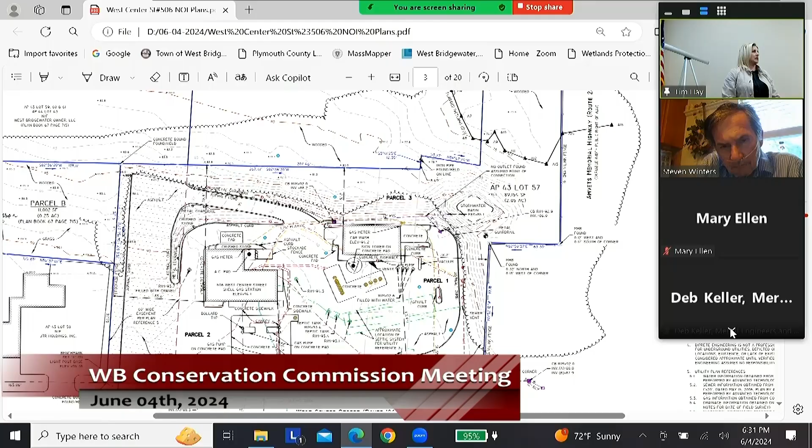That's lot 57, and there's portions of lot 59 and 61, which I will explain to you. So just for history, for the applicant's proposed redevelopment of its property at 506 West Center Street.

The applicant has owned that parcel since 2008. It acquired that - it's an existing Shell station that the applicant acquired from Shell back in 2008, and they've been continuing to operate it as such.

For permitting history, I'm not sure if the commission remembers or was here at the time, but back in 2018 we had started this permitting process for the redevelopment. It's a full raze and rebuild of the existing site to put a Seasons Corner Market, new gas pumps, etc. We had started the process back in 2018, and we were trucking merrily along.

Then we had COVID, so that paused the project. Actually, in hindsight, probably for the better, because recently the applicant has been able to acquire portions of the abutting parcel - that's the reference I made to lots 59 and 61 - to have a better, more complete Seasons Corner Market to the specs that they would usually raze and rebuild these developments.

As you know, the existing station is a bit dated - I know it's a bit of an understatement - but we've been very eager to raze and rebuild and put up a new station and Corner Market. So that's the permitting history.

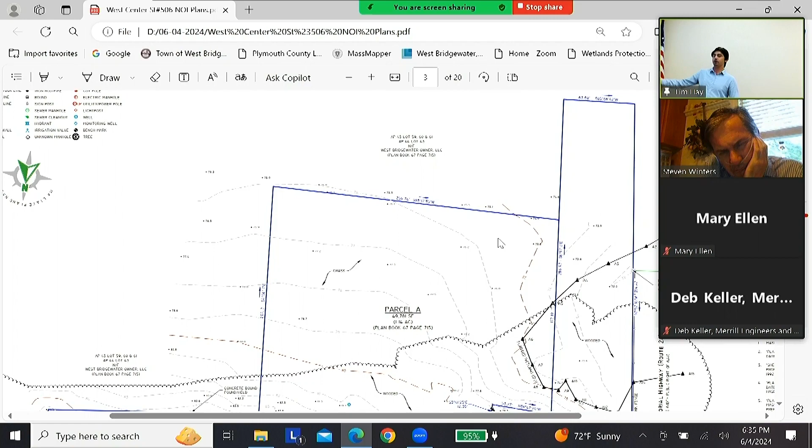Topography ranges from approximately elevation 95 at the building to about elevation 74 in the rear of the site. You can actually see currently, if you go down a little bit, the grade really drops off towards the back of the site.

Currently, stormwater flows from north to south, predominantly from the bottom of your screen to the top of the screen, and ends up either in the wetland, which is in the top right-hand corner, or it continues on to the abutter. A small portion of the site runs out to West Center Street, where it's captured in these catch basins in the right-of-way.

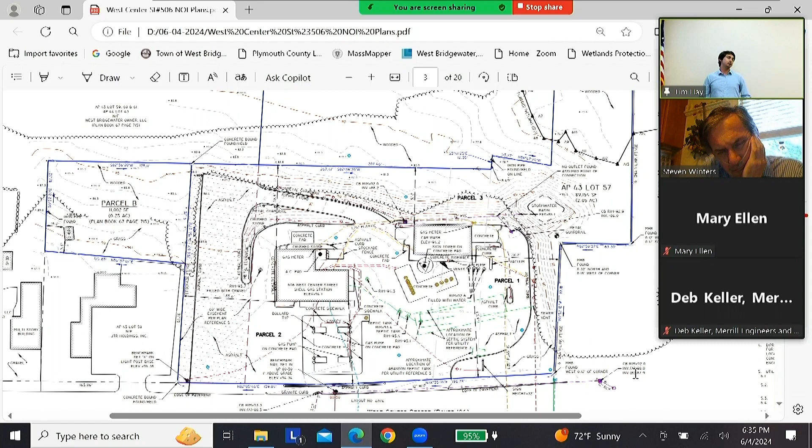Currently, the stormwater on site is captured by one of two catch basins located right here and here, which is then directed directly to that stormwater basin where it overflows into the wetland. The wetland flags are shown on this plan as previously approved from the ANRAD filing a few months ago.

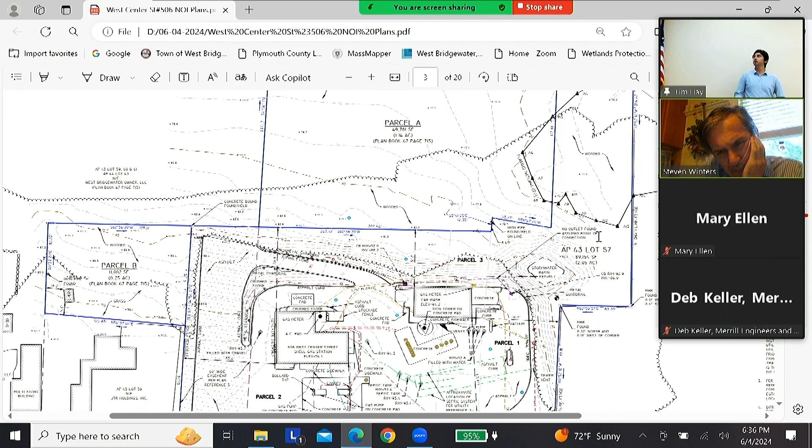One other thing to note for this site is hydrologic soil groups A and D were used in our drainage analysis. You can see from the way the topo drops off in the back and the wetland that the D soils tend to be in that back portion, and we have A soils in the front of our site. We also completed test pits, which confirmed what the web soil survey showed us.

If you want to go ahead, I think 2 plans. Yeah, keep going. And 1 more. Yeah, this works.

This is our proposed site layout plan. The project is a mix of redevelopment and new development as defined by the Mass Stormwater Standards. The site proposes a 4,600 square foot convenience store located here with associated drive-through and parking spaces. We're proposing 6 fuel dispensers with a canopy here and 1 single DEF fluid dispenser island here.

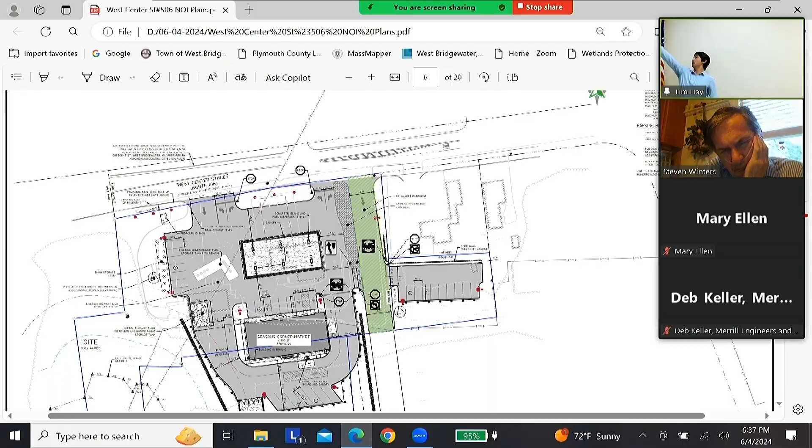There is an existing highway sign on site that will be in the middle of the site, so we're proposing to relocate that sign. The existing underground storage tanks for the fuel will remain.

There will be a total of three retaining walls to fight the big drop-off that we have in the back of the site. The first one being right here, second one being here, and the third being a smaller knee wall on parcel B.

As you can see, we have a green hatched area here. This is a 30-foot access easement, and that access is to the larger warehouse development going on behind us. We have filed a request for a determination with DOT, and that is currently under their review. So as we know more, we'll report back. But my point is that changes are possible due to that coordination.

Can you keep going to the drainage plan? Perfect.

This is our proposed utility and drainage plan. As you can see, we will use a combination of deep sump, hooded catch basins routed through an oil grit separator, a bio filtration system, which will be a focal point, and a detention pond prior to being released to the wetland down here.

The focal point has been sized in accordance with the Mass DEP certification and was included in the stormwater report. The treatment train includes pre-treatment that will remove TSS, total phosphorus, and provide water quality in accordance with the Mass Stormwater Standards and the West Bridgewater Authority's comprehensive stormwater regulations.

The proposed development follows the same ultimate drainage pattern, going from north to south. It's a little confusing because we've done a 180 from the existing conditions plan we were initially talking about, but the same overall drainage patterns will remain. We will be reducing the peak flow rates in all storm events.

This project will be constructed in 1 phase, and the soil erosion and sediment control plan will show the measures that will be installed and maintained throughout construction.

We are requesting one stormwater waiver, and that is because of the soils I spoke about earlier. The good A soils, which are better for infiltration, are located at the front of the site, and the D soils that are not as good for infiltration are located at the bottom of the site. In order to still create the same treatment train required for water quality, we're able to accomplish that without infiltration using the focal point, but unfortunately we cannot provide recharge. So we're requesting a waiver from the recharge requirement.

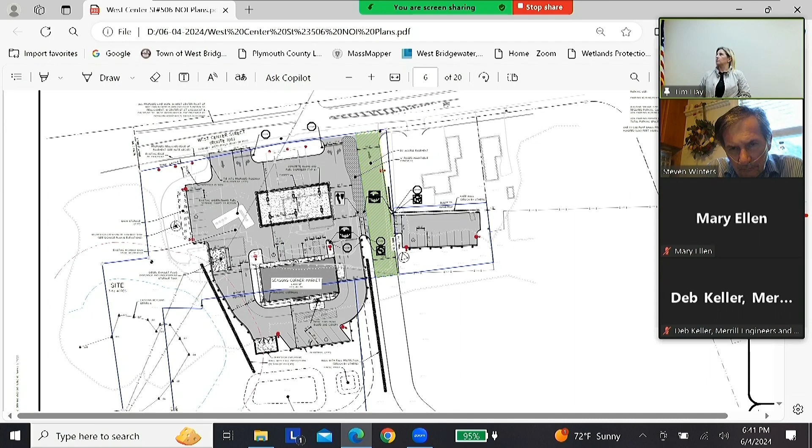I just wanted to reiterate something Daniel mentioned in his presentation, as you can see both on the stormwater plan and previously on the site plan. Tim, can you move to this, please? Understanding that this will be more closely vetted by the planning board and zoning boards as well, I was just pointing this out to you.

We've made a request for determination from Mass DOT, as you can see, for the curb cuts, because this property is encumbered by that green access easement area. Depending on the comments we receive back from Mass DOT, and whether, as they've indicated prior to this point, they're not huge fans of that access easement area, because you can see the curb cut placements to access the site, that was submitted approximately a month ago.

We're waiting to receive comments. As you know, Mass DOT has already looked at some of these plans for the development to the rear, so they've previously commented on it, but we will be subject to the same. That's why we made the request for determination, and so we're just waiting for that.

Station owns that easement? We own the property, and it's an easement in favor of the abutter. So you're allowing them to... Yes. And who's not in favor of it? Station? Quite frankly, neither one of us - owners or station.

Really? Because you can see some of the implications to the site that it makes, and it makes it very challenging. It's also making the grading very challenging. As Daniel mentioned, it's almost a 20-foot difference in grade. And redoing the station, you're coming back? Yes, they're in order, pushing it back a little, which was why acquiring this parcel A area, as we call it, moving that back a little.

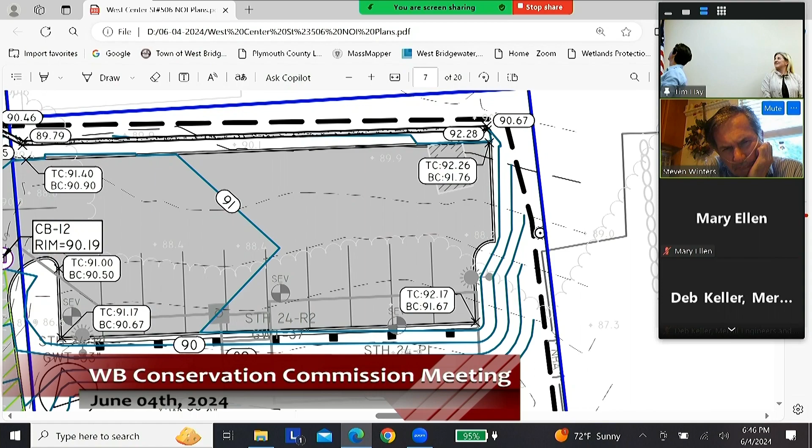Tell me about the drainage. It's impervious surface, so, yeah, correct. If you want to go to one more plan over, we're doing the best job we can to pick up all the impervious area. So there's a catch basin right here, CB-12, so that all of this area drains to that catch basin, which then will be routed to the system. The only small amount that we won't be able to capture would be below that.

My other question was on the recharge you mentioned, could you explain that a little? What I picture is standing water because you can't recharge it. Yeah, no, so it's a great question.

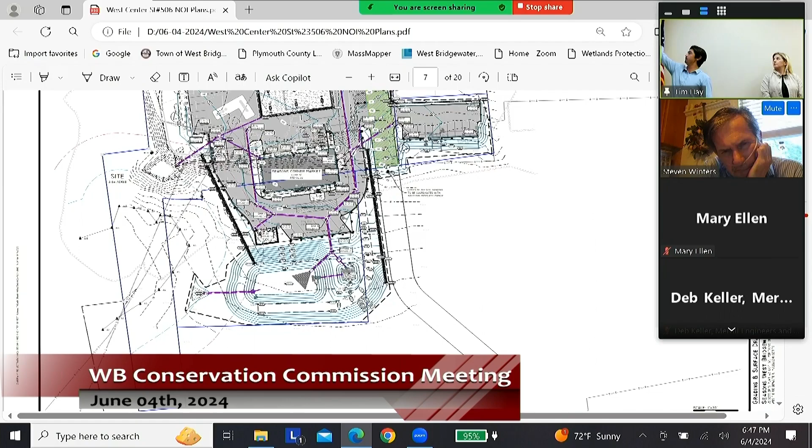If you go down, this is our detention pond at the bottom of the site. And the way we're outletting the system, we're gonna have an under drain, which is this 10-inch pipe going into the outlet control structure. That under drain will be below the finish grade of the bottom of this detention system. And then that will all be able to flow out to this area over here, which is lower than the bottom of the detention system. So it's a recharge, well, you're not really, it's being filtered through the, and so all the water quality treatment occurs before then.

Some recharge will happen naturally within the pond, but we just can't take credit for it. At least it will drain out into the wetlands, and with this design there won't be standing water.

Daniel's the expert on this, but as the site lies from north to south with the grade change, the applicant tried to take advantage of that, accounting for it in the design of where it most naturally fits. There'll be a lot of grading, but it most naturally flows to that point.

So that recharge area, there won't be any standing water there? It's not technically a recharge area. The detention pond will be outletted. They're looking for a waiver for recharge because we're unable to provide recharge given the soils out here, but in this area it'll eventually drain out because of the under-drain we have, so there won't be standing water within this area.

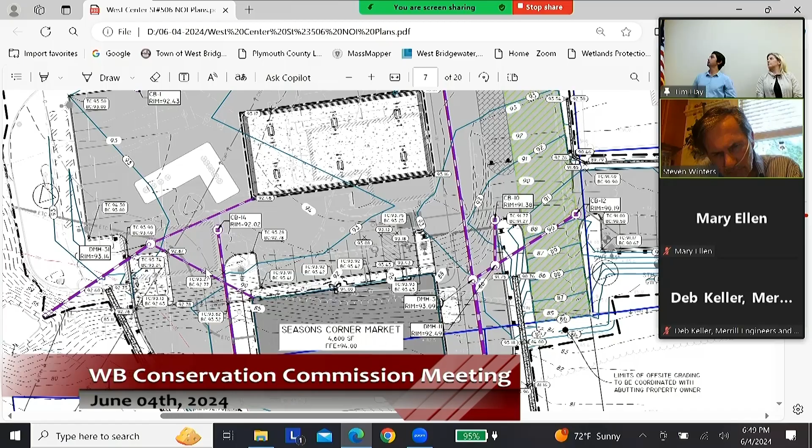You can see here, that's the existing station right there, the existing convenience store. This is the existing drop-off in the back of the site, these lines show the topography. The current barrier wraps around the drive-through in that area Daniel was pointing out. If you use the car wash, that structure over in this area, it's set back from where the car wash sits.

So some fill is going in, I'd imagine, quite a bit of it. Basically this would be where the proposed new Seasons Corner Market would be, down the hill at the bottom.

I suppose, and it's not our purview here, but one of the biggest challenges has always been traffic in and out of there, particularly coming out. I don't know how that gets resolved, but that's not what we do here. That's why I mentioned the request for determination with MassDOT, which is going to be all changed anyway. So that's why I described it as hurrying toward the finish line, knowing we might have to back up a little.

MassDOT is also bumping up against the potential moratorium, so once that roadway's fixed, that's what we're trying to work with. We've had multiple meetings with the town — Michael White's been very helpful, Tim's been very helpful — about the best way to proceed, knowing there are certain challenges to the site, both off West Center Street and the topography and layout, and understanding the town's plans for the West Center Street and Lincoln Street interchange. Being cognizant of that, we need to move forward as far as we can go.

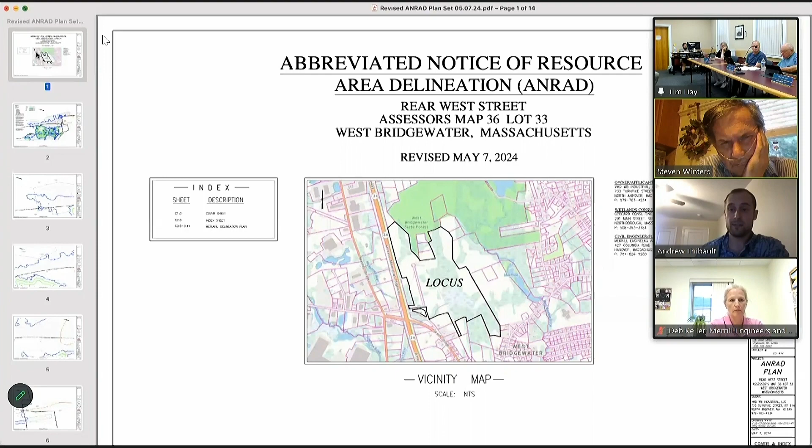Since coming onto the project, Merrill went out and did a significant amount of new field work. They got more detailed topo, more detailed boundary, tree line, and resurveyed the wetland flags. So what we are doing is submitting a corrected, more accurate, and more detailed plan onto the record for the site. As part of that new survey, we were finding areas where the wetland flags were not perfectly lining up - they were located up on fill piles a bit where we wouldn't typically see them. I know during the ANRAD review, Tim himself had a bunch of questions about topo availability.

As the commission knows, there's a significant amount of cut and fill on this site with fill piles located throughout, and the original plans reflected portions of what's available for topo, but not everything. So we had Merrill go out there as recently as this spring and provide a whole new survey of what's been out there. It's important to note that the delineation did not change at all - the flags that Tim and I reviewed in the field just under two years ago are still the same flags that were there, but the survey itself was corrected.

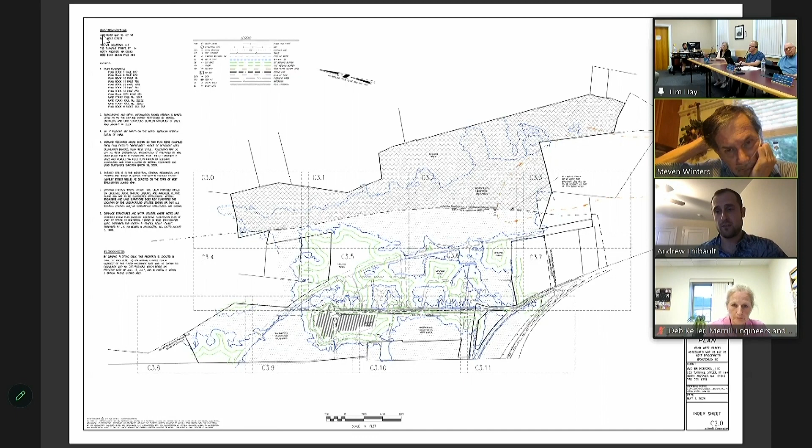So it's an entire new plan set. The limit of confirmation under the ANRAD has not changed - the only thing that has changed is the survey. I think an excellent sheet to capture what I'm talking about would be sheets C3.5 and C3.6 right here. So what we have is a more detailed survey that shows significant limits of the tree line on the property as well as the fill piles.

These were areas where on the original site survey, when Merrill was doing work on the property, we would see wetland flags that would hit fill piles and topos that were close but did not make perfect sense of what they're finding out on the property. So what they did was get a much more detailed survey for us that now shows all of the fill piles, the location of the wetland flags, and updated buffer zones that make significant sense to what you're expecting to see out there.

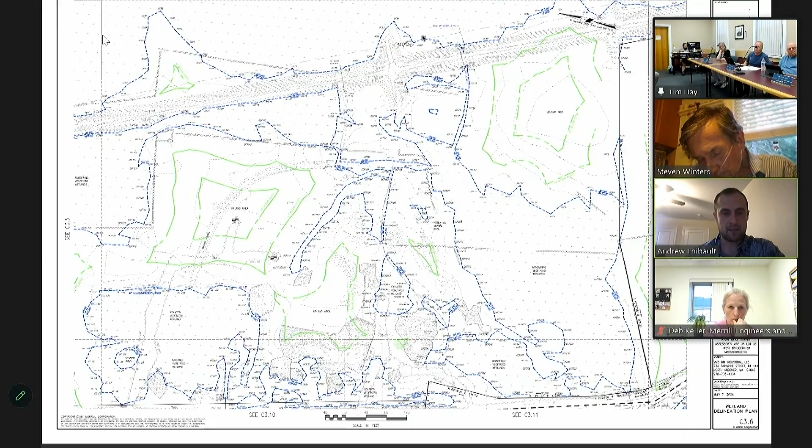I have another visual that I think might be more helpful for the commission, that David prepared for us, showing an overlay of what's changed from the original ANRAD. It helps us see what we saw and why we corrected the plans. Can you guys see this new plan? Perfect. So what we see here is the old ANRAD line that you guys would have seen on the original submitted plan set, shown in orange as the historic limit of what we had here. The blue is what we had resurveyed and rediscovered.

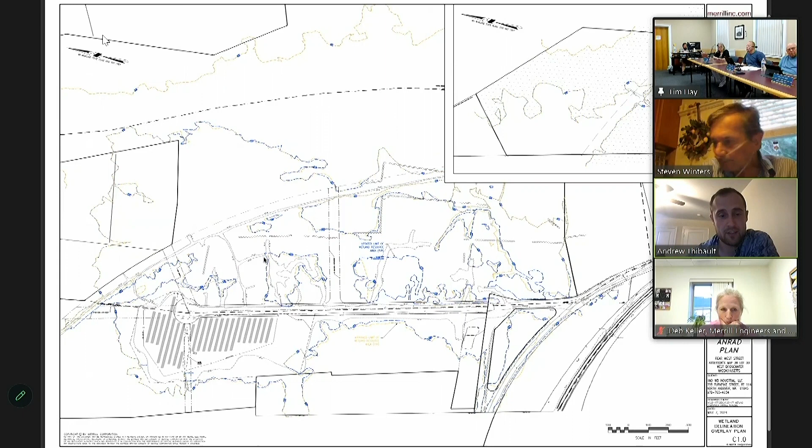When Merrill was updating the entire site survey of the same wetland flag, just field checking each flag, we found that generally the areas of the flags were correct. But the most recent survey, which we know to be accurate, showed a lot of areas that bumped up closer, and many areas not friendly to the site or any expected project on it, but they are what we know to be correct. So the plan was to update the site plans.

We also noticed that the only major revision is the isolated wetlands shown in the center of the site are actually larger in the field than the original survey showed. The flags were always there. Tim and I would have reviewed them in the field, but it appears that during the site survey, portions of them were never gone back and reflagged. So although we confirmed them as accurate in the field, the plans did not reflect the correct location. We increased the survey in this area to correct what was originally flagged as a larger isolated wetland and correctly define that on the plans.

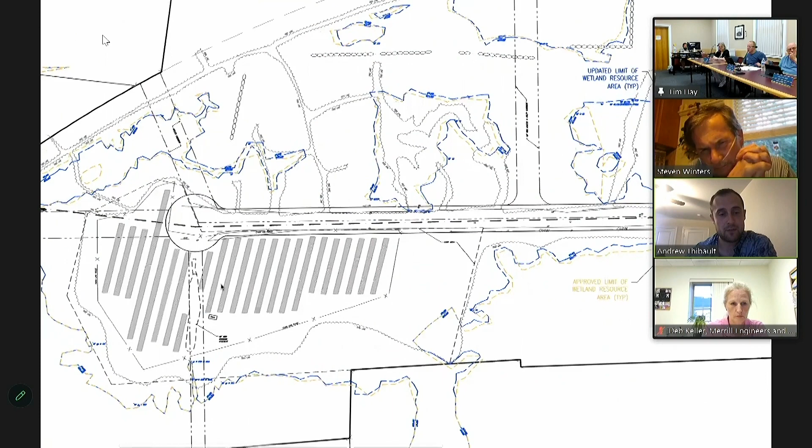The only other major revision to the plans is to correctly identify the detention basin in the southeast corner of the site. There are actually two detention basins on the site, one associated with the solar field and one with the roadway. We originally only identified the solar field one as a detention basin.

To reiterate, the delineation was always the same. We have not hung any new flags out there. It was a new survey based on what Tim and I looked at in the field, but it was a survey that we found to be more detailed, more accurate. It's the one we are confident about moving forward. We wanted to bring this to the commission's attention and accept a more detailed and correct plan on the record. Deb, if you want to add anything, or Tim, by all means, but that's what I have for the commission tonight.

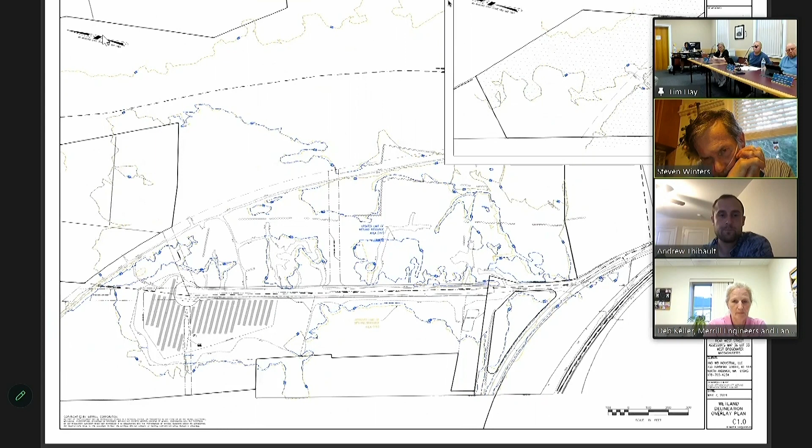Oh, great job. Nothing from my end. Thank you. I don't have any questions, thanks.

As Andrew said, it's more an administrative change that we're accepting an updated set of plans that are more accurate and reflect what really is there. The roadway did have a drainage system layout; they identified it and put it on there. We knew there was one with the solar field because that was part of the permitting for that.

How long ago was that put in, the solar field? Yeah, that was a while ago. Solar field, I think, was 2010. Yeah, I remember that coming through. Yeah, that sounds about right to me. It's been there a while.

And this has just been revised from then? The ANRAD we did, the wetland line, that was in 2022. We approved that in 2022. So going forward with their design, they just want to use the most accurate data. So with Merrill's system, they've updated it to the most accurate survey.

Sounds good. So we need a motion. I'll entertain a motion to accept the new plans that were revised May 7th, 2024. So moved. Second. All in favor? Aye. Aye.